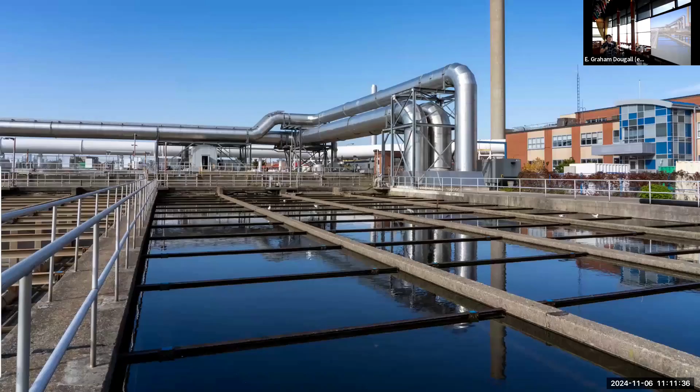All right, so moving on to the next slide. I will tell you the images that are in the slides because I don't repeat the images. So this particular one is Ashbridges Bay treatment plant, which is one of the sites I photographed. So Interconnected is a visual exploration of the Toronto wastewater system. It documents the path of water from our home to the lake and back, and it shows the connection between wastewater and our drinking water here in Toronto.

So why did I decide to work on this topic? You asked me this just a few minutes ago. So we can move on to slide 3. Let's go back a little ways.

My family is part of the Armenian diaspora that migrated to Iran in the 17th century. So my ancestors, I should say, not my family in particular. So in the 1970s, when I was a child there, I experienced something that not many people did, besides the revolution, that is. You see, the city itself at the time was around 4.8 million people, the city of Tehran. And these numbers are, of course, according to Census Online.

At the time, most of Tehran had no sewer system. You might find that an incredible fact, but most houses were on septic tanks, many of which were actually built underneath the houses, which in hindsight is not a very safe option. On the other hand, rainwater was basically traveling through gutters along the streets. So what would happen was a lot of times cars would end up in those gutters, people would end up in those gutters. I myself fell head first and suffered my first concussion, first of many, in one of these gutters.

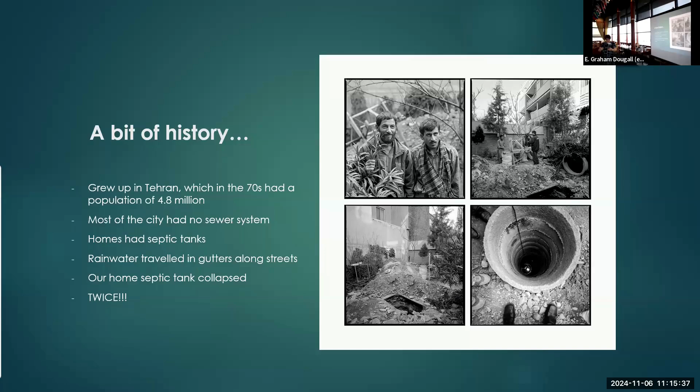And then in 2001, I went back for a 6-month visit. My dad and I photographed the country together. And the septic tank, which had been relocated to the garden, collapsed again. So I experienced this lovely incident twice in my lifetime. These are pictures of the garden where they dug a new one. They used that earth to fill in the old one. A lot of the workers were migrant workers from Afghanistan doing this delightful work. All right, let's move on to the next.

My mom passed away in 2020 of dementia. In her honor, I wanted to go back and do an MFA. Toronto was her favorite city. Water was one of the resources she was very pleased with in Canada, because in a lot of countries you can't drink the water, and even in Canada we have water boil advisories. We'll talk about that later.

So I decided to do a project in Toronto because it was the tail end of the pandemic. Travel was still quite complicated with lockdown restrictions and quarantines and so on. And so I decided to do a project on Toronto.

In combination, we moved to a new home in North York, and our water smelled funky. So we were a little worried. We called City of Toronto. They tested the water and educated us about what was causing the odor. Can you take a guess at what might have been causing it?

Not a bad guess, because that does happen. It was actually, you know how in schools we were taught not to put cooking oil down the sink? It was the cooking oil down the sink, which was trapping food. And every time we would turn on the water, the gas would release odors.

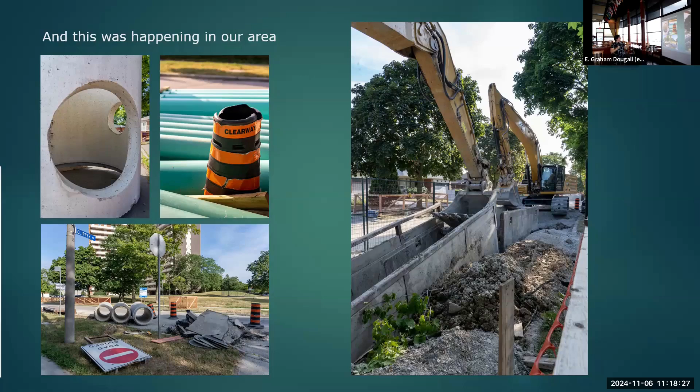The next slide is also some of the work being done in that area. This took about 16 months, and it is moving down from our neighborhood, continuing further. We are at Victoria Park, at the northeast end of North York. That whole area is being done.

Part of what we learned at Ryerson TMU was research methods, and research creation was one of the methods we were taught about. I thought this would be the best method for me because essentially, with research creation, you don't know what your final project will look like, because the research you do in the topic dictates what you will document. So you don't decide in advance what you're going to photograph — you do the research first and then decide what elements to document.

So basically, I started my highly scientific research method of going on social media and asking people if they knew anybody in Toronto Water, or anyone working with lakes and rivers, and the connections blew up. I know hundreds of people in this city from the various jobs I've done. This lady, Christina, was one of my clients, and she put me in touch with someone who used to work at Toronto Water but no longer worked there.

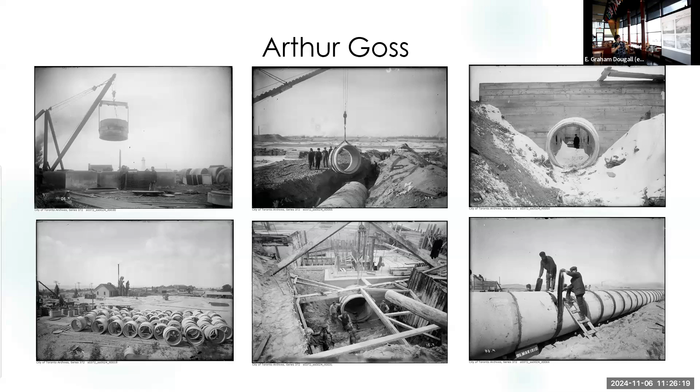Now that pipe might have been extended - it might not have been 5 kilometers to begin with. I don't know that detail, but even 2 kilometers would have been a huge undertaking for the systems in place at the time. So yes, my aim was to be Goss 2.0, the second City of Toronto photographer - it's coming, hopefully.

That's the previous story.

All of that permeable land has now become impermeable, which of course affects runoff.

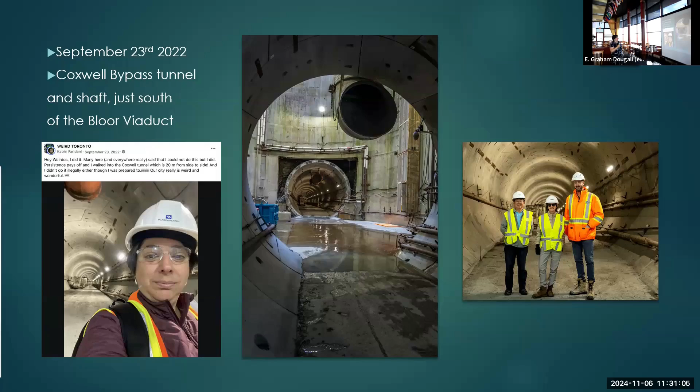I did end up thinking that I need to give people an idea of scale and position for these projects, because that previous picture of a tunnel doesn't really tell people much. So giving aerial shots, I hired a drone operator who helped me photograph. I have since purchased a drone so I can do the West End, but I just wanted to give people an idea of the scale of these things.

We took advantage of fall colors and went out fall of 2022, doing a couple of sites in one day, both video and photography, because the video shows the entire space. We flew the drone over the Bloor Viaduct so people could see the bridge and relate to where it was and how big it was. All right, next.

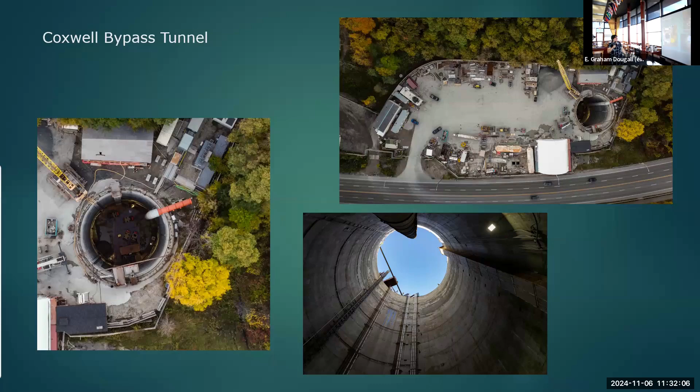Ashbridges Bay water treatment plant is where all that water terminates. Of all the people that I was connected to through my social media research and also professors at TMU, they were really very giving. I was even hired as a research assistant for the Water Policy Cafe, and I still work with them because Carolyn Johns, who's the head of the Water Policy Cafe, wants to take this project and create a video for policy makers, because she says people are making financial decisions about water budgets and they don't even know the full cycle. So she helped me, and another professor at University of Toronto helped me.

I happened to write to her one night just to touch base, and she emailed me immediately and said, I'm taking my biochemistry class to Ashbridges Bay tomorrow, do you want to come along? So sometimes you just get lucky, and I went with them.

Because it was a full class of biochemistry students, we sat there and they gave us a 45-minute information session on how the system operates and the history of the plant. I had been recording all of these site visits because I couldn't take notes while photographing, so I had hours and hours of audio which I had to transcribe. I used YouTube to transcribe it for me - it wasn't perfect, but it was free.

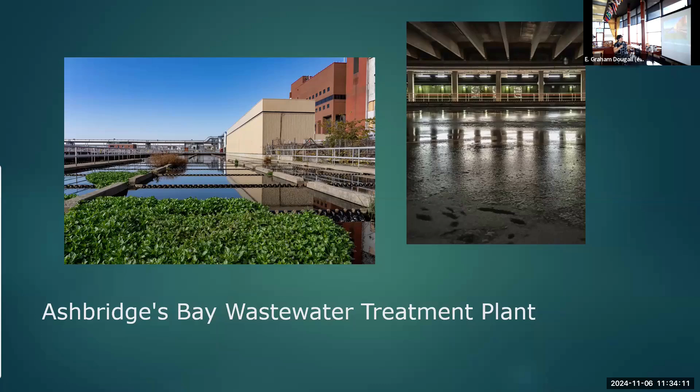We can move on to the next slide. The main tank is the size of 6 Olympic size swimming pools. It is a biological treatment plant, so the same bacteria that's in our gut is what's breaking down the waste in these pools. And yes, this is sewage, but it's only 0.2% sewage - the rest is your kitchen water, your showers, your laundry, and runoff, which is also treated.

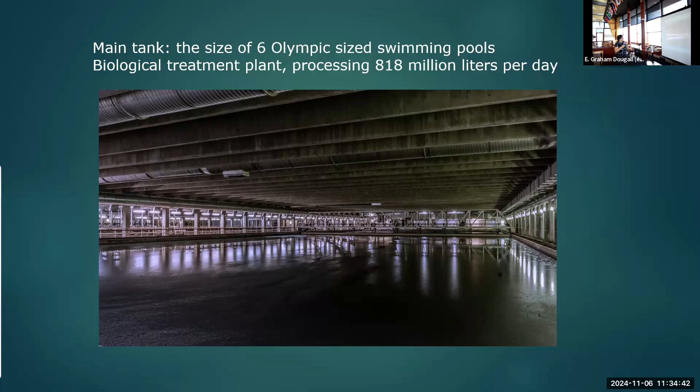You can't see it very well here, but maybe in the next slide you can see there's some scum on the top of the water. This is actually all the grease and oils from our kitchens, which we're really not supposed to be putting down there - and I've stopped doing it. I now clean everything with paper towels, put it in compost, and then wash my pots and pans.

This hydraulic arm has attachments at the bottom, so the oils are collected from the surface and processed below in tanks that we'll see later. The bottom is scraped by attachments on this arm that scrape the heavier solids from the bottom - so the same arm processes both top and bottom. The smell in this is highly chemical - I know that's not a word - because it's mixed with chemicals as it's coming into the tank.

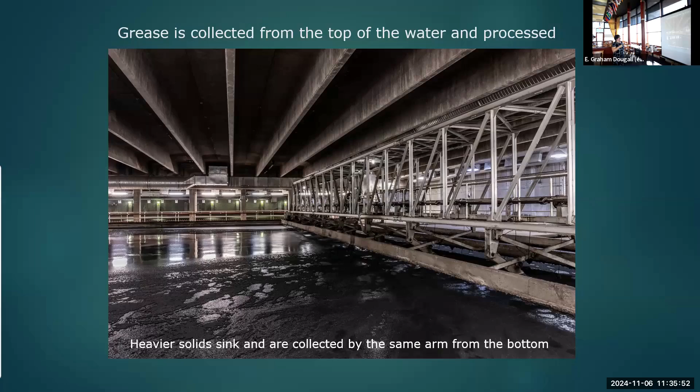I was just happy I was wearing a face mask because of COVID. So we can move on to the next slide. There's also solids like branches, money, rings.

I had an email from a woman who saw the blogTO article that you saw, and wrote to me and said, I lost my grandmother's rings. I had them in a tissue and they fell in the toilet, and I saw your article. So she wrote to me and I wrote to David and said, someone's lost rings, what can be done? And David basically said, we have two 53-foot solid waste extraction tanks.

These get washed and dried, by the way, before they go into the landfill. But basically it was like a needle in a haystack - there's no way of finding them. Then she wrote me back a few days later and said, oh, I found the tissue somewhere else, I haven't lost the rings after all. So that was lucky for her.

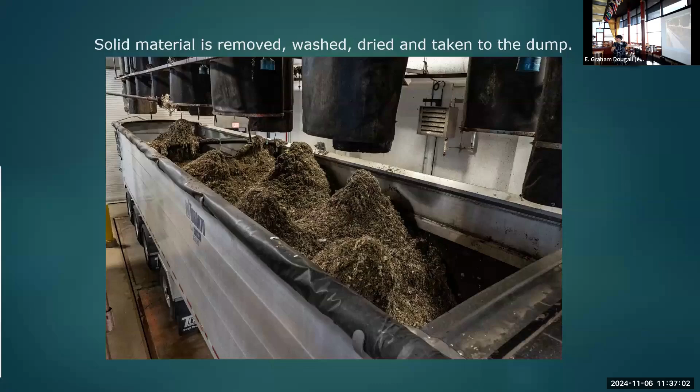All right, so that was the solids. Anything larger than 6 millimeters gets pulled by these big rollers before the water goes in. All right, we can move forward.

So basically, these three mason jars - the center one is what the water looks like when all the solids are removed, the twigs and leaves and whatnot, before being processed. The jar on the left is the water that comes out after the processing, after the filtration happens. And I asked David during this meeting, I said, would you drink that water?

And he said, absolutely, but it's very highly chlorinated. So they don't return the water chlorinated to the lake, because that's going to upset the natural balance of the lake. So the water sits in outdoor tanks and is naturally dechlorinated by UV light, and then it's returned to the lake. The only thing this system cannot remove is salt, the road salt that we use so heavily - and that's a whole other topic I'm working on right now. Okay, so we can move on to the next slide.

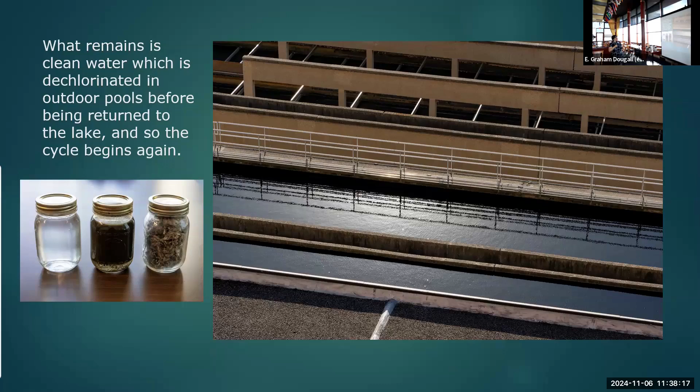So basically that terminated, that was the end of the water flowing to the lake. And then we have water being extracted from the lake for our consumption. So the island water treatment plant is on Ward Island. It is the first one that was built, which is what was photographed by our photographs over 100 years ago now.

And the intake pipes are 5.3 kilometers out by Lake Ontario. And if you don't know what that looks like, Neil, the manager of the island treatment plant, took a cross section of the pipe and put it so that you could see the CN Tower through it. I think it makes for a pretty photograph, right? But also it's 10 times the height of the CN Tower. So he put that together for people to understand the connection of the length of the intake pipes.

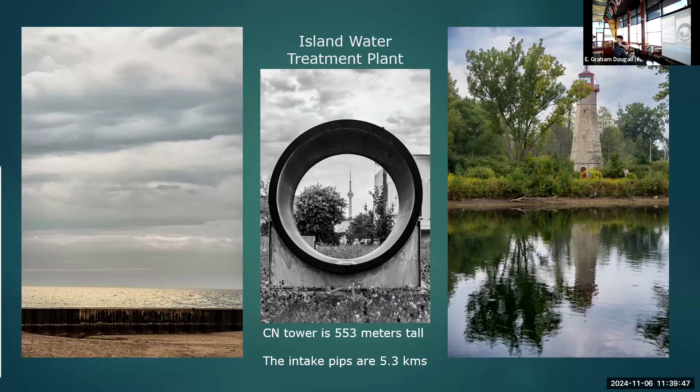So one of the reasons why they intake from so far away is because they want to be further away from where Ashbridges is dumping, right? I don't want to use the word dumping, that's not the right word. So the water from Ashbridges is entering close to shore. They want to take the water from the middle of the lake, so it's clean. All right, let's move on.

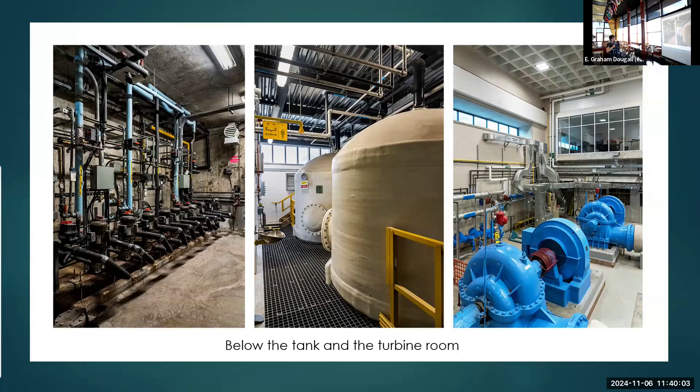This is some of the infrastructure below the tank at the treatment plant and the turbine room. I quite like this triptych, so I thought I would include it, but we can move on to the next. And this is the main tank at the water plant, at the island water plant.

So one of the things that happened with Neil at the island water treatment plant was that he gave me a 4-hour tour. He was clearly very proud of the work that they were doing and wanted to explain every bit of it to me, which of course I recorded. So I have a 4-hour audio file. After transcribing that, for my exhibition, I took excerpts from those audio files for the labels of the images that I had in the exhibition, because I wanted the information to be accurate, as well as in the book.

So once I sort of figured out which pictures matched with what captions, I sent it back to the managers for fact checking and corrections if necessary, and that is what I had up at my exhibition.

But the water that comes in is 3 degrees, and the water that we use out of our cold tap is 13 degrees. Does anyone know how it warms up? Didn't think so. Okay, so let's go on to the next slide.

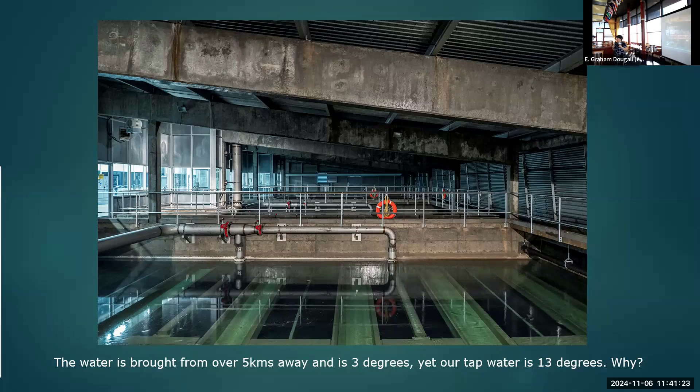Has anyone heard of a company called Enwave? They're down by the Rogers Center, so you can see that building. So the John Street pumping station is just underneath the Enwave building there. And they take the lake water and they run it through these pipes. They don't touch the water itself. They use the temperature from the pipes and harness that cooling, and they cool the buildings in the downtown core of Toronto.

And not only does that generate income for the city of Toronto, but it warms up the water for us at no cost. And it's also saving energy for Enwave because they're taking the natural cool temperature of the water and using that instead of having to cool those buildings through other means.

So that system is called the Deep Lake Water Cooling, and it's being expanded. And it's also, they're looking at the reverse. They're looking at taking the water from Ashbridges Bay, which is much warmer, using that energy to heat those buildings. So that's something they're working on.

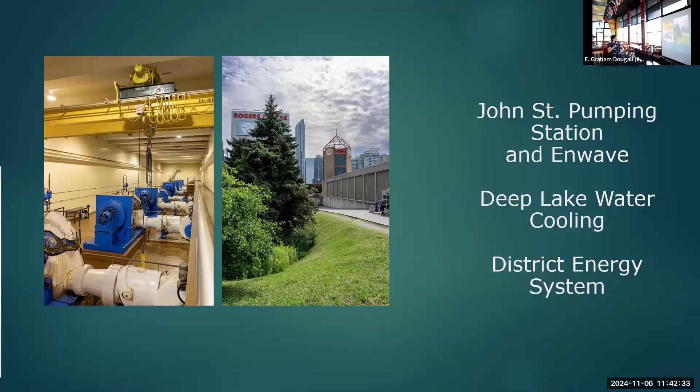Okay, and last but not least is RC Harris Water Treatment Plant, the landmark of Toronto, one of the landmarks.

Yes, they do, yes. They use both, to be honest.

So the water treatment plant is at the base of Victoria. It used to be called the Victoria Pumping Station. It is 2 buildings. I photographed both.

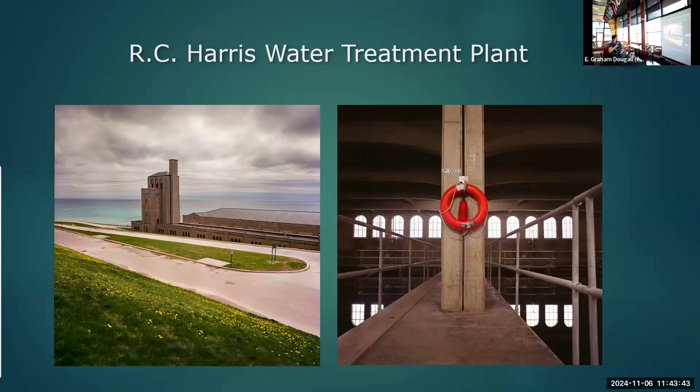Unlike the island water treatment plant, the manager of RC Harris sort of left me to do my thing. Like, here's the tanks, go photograph. So I actually ended up photographing this as my first location, which is ironic because it's at the end of the cycle. But I photographed it multiple times. And one of the reasons why I went back was because I found out that they do backwashing to clean the tanks. So if we go on to the next image...

This is the first shot I took for my project. That is the last shot I took for my project. And there's a print of that over there, like, looks much better.

But I wanted the sound of water gallery. Once I knew I had the image center gallery, I wanted the sound of water, and I knew I would have access to video, a TV screen, so I could include a video element.

So I went back and I was able to video record the backwashing process, which is done during the daytime at RC Harris because they have over 20 tanks. But at the island treatment plant, it's only done at night when there's less demand for water. So they drain one of the tanks during the day just for me to video record.

So I'm one of three people in Toronto who has seen the island water treatment plant tanks being backwashed. The RC Harris ones get done during the day because they have 20 tanks, so there's much more flexibility for them. So I did that.

Basically a third of the drinking water we use in Toronto comes from RC Harris, and it serves not just the East End. Twenty percent comes from the island water plant. As demand got higher and higher, they started building more.

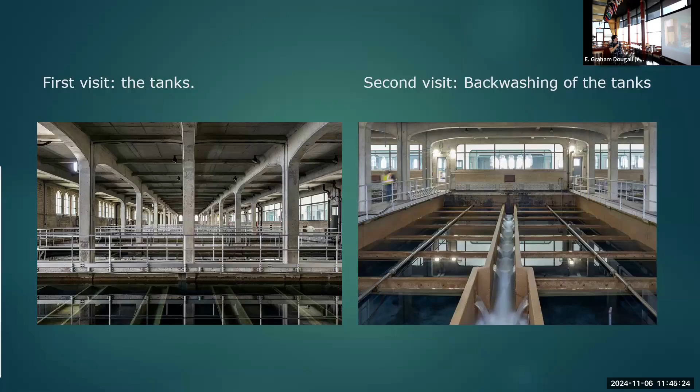If anyone has gone to Doors Open, you might have been able to enter RC Harris. I don't know if they let you actually go into the tank room, but it was cool and quiet—it was just lovely. You can go into that central walkway. They let you during Doors Open go there? Yes, they do—it's like an atrium. The place is upstairs. What's even more beautiful is the holding tanks below, but I couldn't go into them because they're full of water. Arthur Goss photographed those before they were in use.

So you see these big columns in a row. It's just photographically delicious, but I couldn't access them—the building.

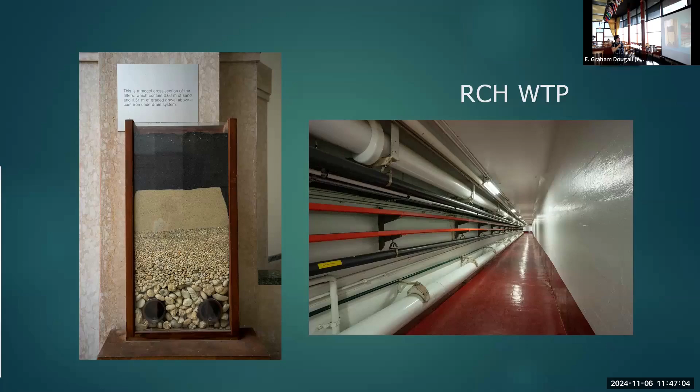So part of what I did with this project was look at solutions, because runoff is something we're all responsible for. The new mayor is looking at possibly taxing very large properties for their runoff. It's not going to affect us in regular sized homes. But I did look at solutions, and one of the things that's very cheap and easy to do is rain barrels.

It's not good for you to use tap water on your garden because of its chlorinated nature—it would be better to use rainwater. Rain gardens aren't that difficult to build, and actually the city of Hamilton and Dundas has financial incentives for homeowners to build rain gardens on their properties. Not sure why Toronto doesn't have it. Toronto has it for large businesses—there's a bylaw requiring a green roof if they're over, I think, 2,000 square meters. So that's in place, but nothing for residential property.